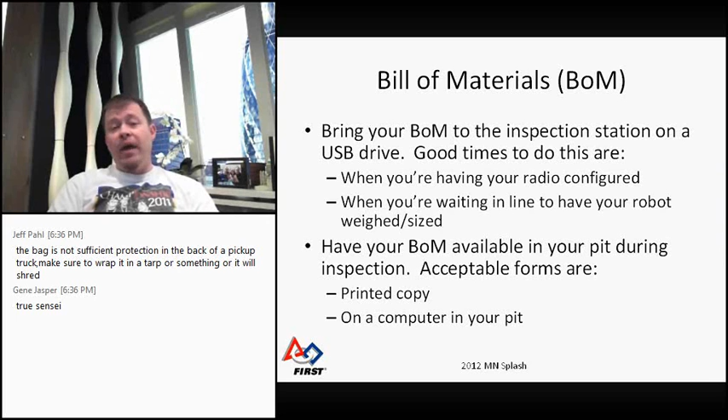Your bill of materials needs to be available at two different times. First, on a USB flash drive that you bring to the inspection station so we can load it onto the computers. This way, FIRST can use that information to help further fill out the kit parts in the future. Good times to do this are when you're configuring your radio, since you're already at the inspection station, or when you're waiting in line to have your robot weighed and sized, since you'll be right by that computer as well. You also have to have the bill of materials available in your pit during inspection. This can be done either on a printout or on a computer you have in your pit. You don't want the inspector to go back to the inspection computers to look at your bill of materials. It needs to be available in your pit.

So on to the actual inspection. There are a number of different steps in the inspection process that we're going to touch on here. The first is actually getting ready for the inspection. You want to take your bumpers off and remove your battery from your robot.

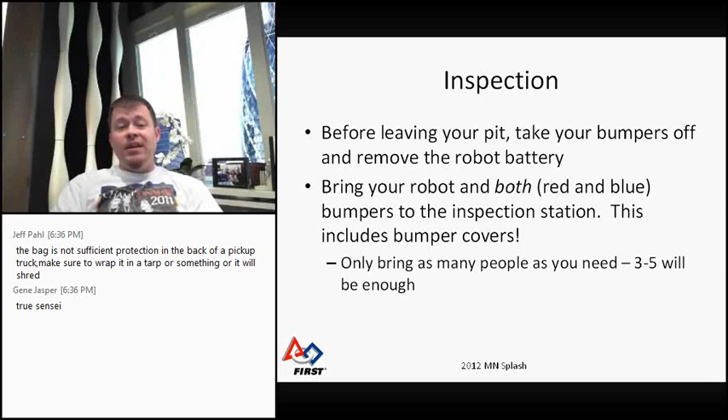When you bring your robot up to the inspection station, make sure you bring your bumpers as well, both sets, red and blue, including any bumper covers you might have. This way we can get a weight of both your robot and your bumpers to ensure your bumpers are within the allowable weight, and it lets us later weigh your robot with bumpers on for convenience going into the elimination matches. Only bring as many people as you actually need to move the robot and bumpers around. The inspection station can get awfully crowded when you have 20 teams trying to go through inspection at the last minute.

At the inspection station, you're going to start out by weighing and sizing your robot and weighing your bumpers. After you're weighed and sized, take your robot back to your pits. The inspector will either follow you straight back, or if there's a line for inspectors, because we only have so many at each regional, one will show up at a later point.

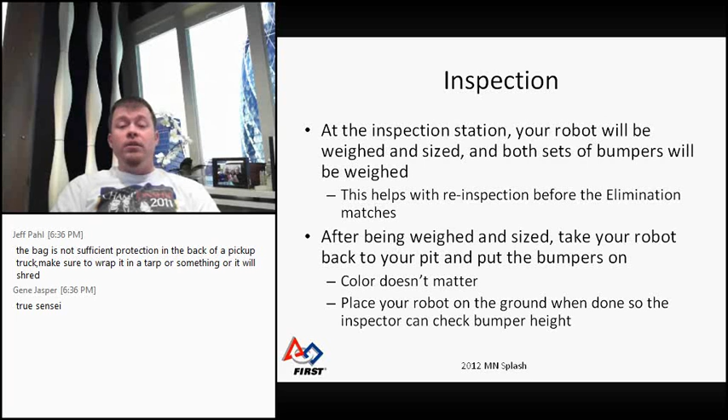When you get back to your pit, make sure you put your bumpers on. It doesn't matter which color, just put on the bumpers for your next match. We're going to want to see the robot on the ground so that we can check your bumper height, which is usually a pretty strict requirement in the rules.

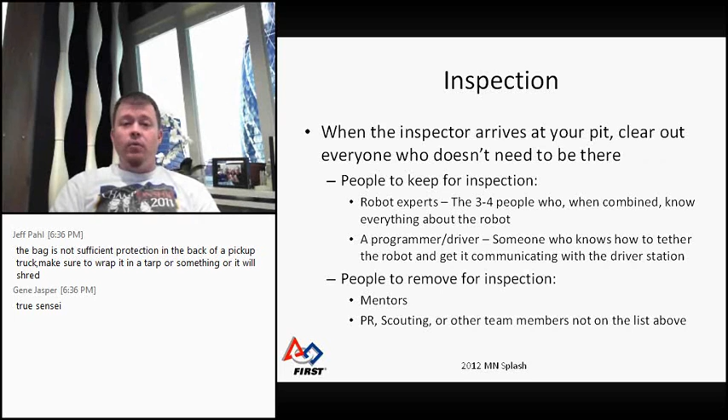When the inspector arrives at your pit, you want to clear out everyone who's not involved. We want to talk with the students, and only those students who actually know about the robot. Typically you may have 3 or 4 people who know about electronics on the robot, but we only really need one of them. You may have different people who are experts in different subsystems, so make sure they're all available. But get your mentors out of there, get your PR team out of there, get everyone who's not going to be interacting with the inspector out of the pits so that you can have room to walk around the robot and check it all out.

During the inspection, the inspector is going to be asking you a lot of questions. They're going to ask how many motors you have, how a particular mechanism works, and to describe your pneumatic system. Take these opportunities to show off your robot. Tell them how things work. Be proud of what you've accomplished, and the inspection is going to go a lot smoother.

Now, before you bag up your robot, take a look at the inspection checklist. It's usually posted about a week before we lock everything up, so that gives you plenty of time to go through the checklist and make sure you know everything you need to know. Have mentors, parents, teachers, or whoever you can get a hold of go through a mock inspection with you and make sure there are going to be no surprises when you get there. For example, make sure you don't have too many motors on your robot.

Now, reinspection. There are really two types of reinspection: voluntary reinspection, and the mandatory reinspection before the elimination matches. Voluntary reinspection occurs when you make a change to your robot. If you are adding on a mini bot deployment system, or you're modifying something on your tube grabber, you're going to want to come up to the inspection station and let us know that you've made some modifications. We'll send an inspector around, and that inspector will look at that specific area you've modified.

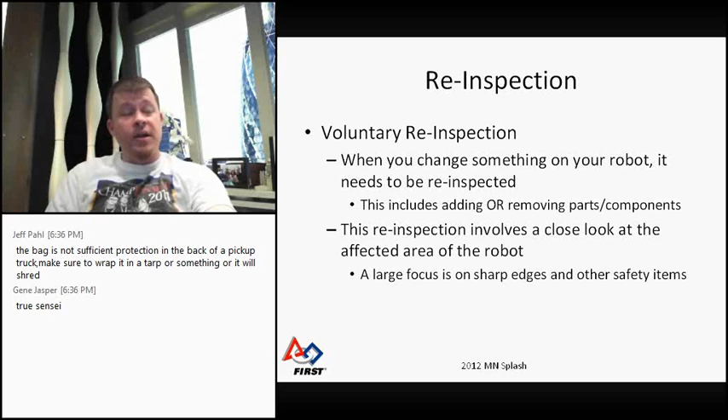Now, reinspection before the elimination matches is mandatory for all teams. After your last qualification match, we want you to bring your robot straight back to the inspection station, and we're going to reweigh you. You'll take your battery out, but you can leave your bumpers on for this reweighing. This way we can take the weight of your bumpers plus the weight of your robot against the weight your robot currently is, and it gives us a good indication if you've changed anything and forgotten to tell us. If your weight is off from what we expect, we're going to take a closer look, ask you what you've changed, and go over and make sure everything is still within the rules.

And so that's it for the process portion. Are there any questions?

Somebody did make a comment that the bag's not sufficient protection in the back of a pickup truck. Make sure to wrap it in a tarp or something or it will shred. You can imagine in the back of a pickup truck you get a lot of wind going through there. And if you've ever seen anyone going down the highway with a tarp hanging off the back of the truck, it just flaps all over the place and your bag will get some pretty serious holes in it.

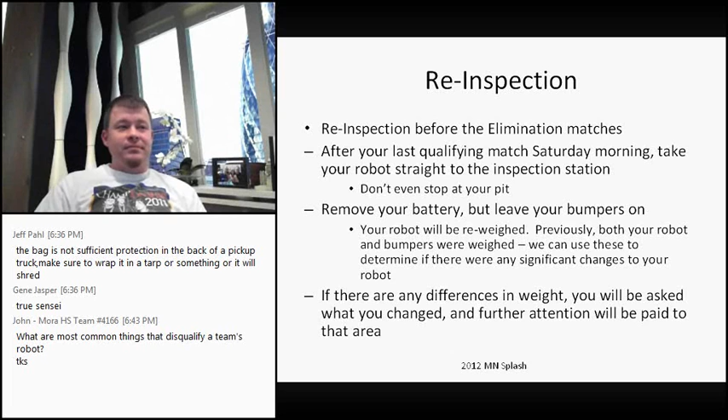As soon as I figure out how to do this. For those of you out there, Jeff does not have a webcam, so we will pause the video for this session. Nobody really wants to see what I look like anyway, so.

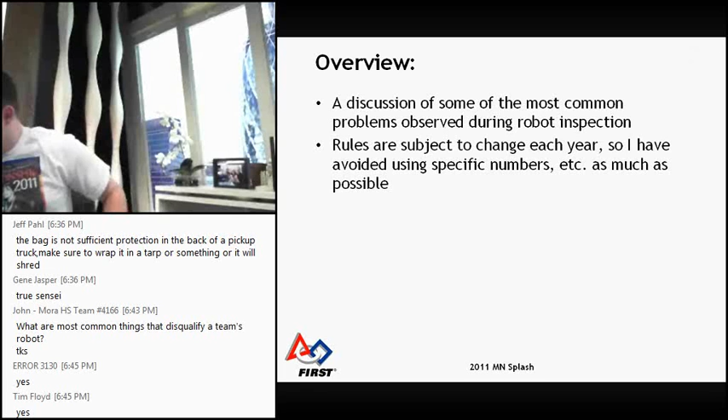The weight limit has changed a couple of times since I've been doing this, the size limits have changed. I've been doing FIRST since before there was a kit chassis in the kit, so when people say 'you always get this in the kit,' I say no you don't. So I'm just going to talk in generalities. These are all based on prior years' competitions—I haven't gotten to see this year's rules either, not that I haven't asked. So everything is subject to change January 7th, but I always start with those things.

So, number one, the quickest and easiest way to fail inspection is weight. There is a weight limit—I think the heaviest robot I've ever seen was about 200 pounds. You're going to hear me repeat certain themes over and over during this presentation because they're very important. Weight is one of them.

This is something I could spend an hour just on this part of the presentation, but if you don't take anything else away from this, take this: you want to manage your weight from the day of kickoff, not wait until you get to the competition and think you're going to drill holes in it. So, if you want a fun exercise, sit down sometime and calculate how many quarter-inch holes you have to drill in a quarter-inch piece of aluminum to lose 1 pound, and then tell me if you think you're going to do that in the pits on Thursday afternoon at a regional.

So, the best way to do this is make sure you have a weight budget. Keep track of each subsystem, keep track of the weight of each piece. The kids here with me from my team know what a total pain I am about the weight budget.

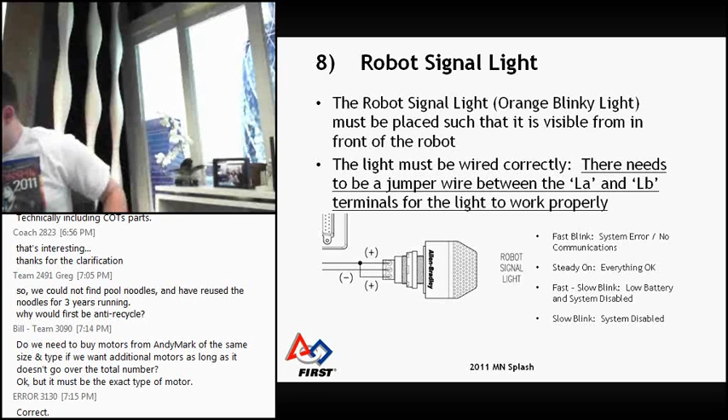Pneumatics. Improper operation of the air compressor is another one of the most common problems we run into. You get a pressure sensor switch in the kit. You're supposed to wire the pressure sensor to the cRIO Digital Sidecar, not just in line with the compressor. Every year I see at least one where it's just wired in line with the compressor.

The cRIO must control the compressor through software using a spike relay. This is so that when the field disables your robot, the compressor is disabled. We don't want it to sit out there and continue running if we need to shut your robot off because we have a problem, especially if it's due to some sort of pneumatic failure and you've got hoses flailing around.

The other reason you can't wire the switch in series, since I get asked this question every year, is if you pull the data sheet for the switch, it's about a 3 or 4 amp switch, maybe rated for 5 amps. The compressor pulls about 25 amps at startup. Yeah, the switch works, it'll work for a little while wired in line, but it will not work that way for long.

You need to set the software up so that the compressor shuts off at less than 125 psi. If the compressor shuts off when the switch opens and closes, you should be just fine.

The spike relay that you use to control the compressor is the only place where you can pull the little yellow fuse out and replace it with a 20 amp circuit breaker. We tell the inspectors to check this.

Sometimes it gets missed. I know of an instance last year where it probably very possibly cost a team a regional championship. The reason is that compressor pulls about 25 amps at startup, and it's a 20 amp slow blow fuse. You can get about 16 to 18 matches before that fuse reaches the point where it finally says, I'm tired of being abused this way. You figure it out, 16 to 18 matches puts you about 3:30 on Saturday afternoon. That is not when you want to find out that you no longer have any pneumatics in your robot.

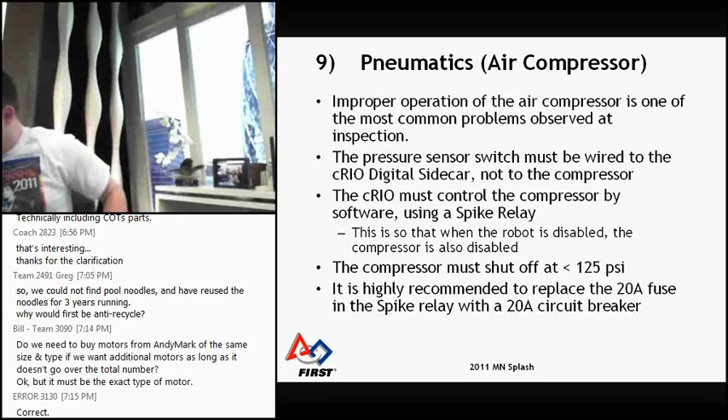So we try to get all the inspectors to check this. It does get missed, but you can go ahead and do that. The other thing we run into is teams that replace all the spike fuses with 20 amp breakers, and you can't do that, only on the compressor, because of the high current draw, mostly related to the older kit compressor. The little compressor that came last year in the rookie kits doesn't draw as much current, but you can still do the replacement.

I'm going to say, don't use it more than whatever the number and type of pressure storage tanks are that are allowed in the rules.

Previous years, there have been 2 tanks, 4 tanks. Last year, it was basically whatever amount of storage you could bolt on your robot and stay within the weight limit. I don't know if they'll go back to a defined limit this year or not. But make sure you read the rules and see if there is a limit. Don't just assume because there was no limit last year that there's no limit this year.

The other thing I'm not sure about right now is last year a lot of teams started using plastic storage tanks. AndyMark is now selling the plastic storage tanks in a kit that they sell. Keep in mind that AndyMark sells a lot of stuff to people who build robots for applications other than FIRST. Not necessarily everything on their website is FIRST legal. Those white plastic tanks may or may not be legal this year.

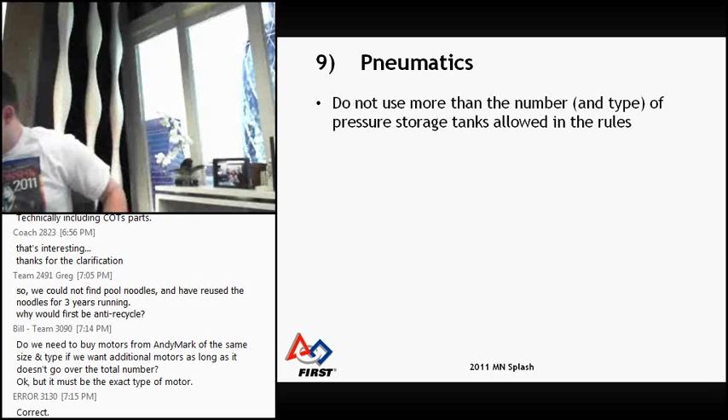I've heard some noise that there might be something, or there might be some sort of a rule, and I'm just basing this on speculation. I don't know anything that says that if you use a plastic tank, it must be protected. Because we saw them on robots last year where they were out on parts of the robot that were getting hit by other robots and stuff, and it became a safety concern. So like I say, I don't know anything. If they're legal this year, I would not discourage their use. They're lighter than the aluminum ones, they're cheap. Just pay attention to if there are any rules that say if and how they can be used. Goes back to the whole, just because it was legal last year doesn't mean it's legal this year discussion.

That's just the whole pneumatics thing, but the pressure relief valve that comes in the kit of parts must be directly attached to the compressor, not through a piece of hose, rigidly attached to the compressor. You need to set it to the appropriate pressure, and we do check that by shorting out your pressure switch and seeing where it goes to. Usually there's directions posted with it. If you're not sure how to do it, send me an email, send John an email, contact a veteran team around you that knows how to do it.

You have to have an easily accessible vent valve, and that vent valve needs to drop the entire pneumatic system to atmospheric pressure. It needs to be upstream of your first regulator.

All pneumatic components must meet the minimum pressure rating given in the rules, which typically in the past has been 125 psi. If you're using pneumatic parts that did not come in the kit, you must have manufacturer's documentation for those parts, or they must be clearly stamped by the manufacturer with a pressure rating. Expect to be asked for documentation at inspection for anything you bought that's not in the kit - air cylinders, pressure tanks, tubing. That's one to watch out for, if you buy tubing, a lot of tubing doesn't come with a pressure marking on it. Be prepared to show me a receipt that says you bought 100 feet of type X tubing and the manufacturer's published data sheet for tubing type X.

So, moving on to item number 10, firmware versions. Even if you got a new cRIO this year, odds are it shipped from National Instruments prior to somebody making a firmware update. So pay attention to the team updates that come out through the course of the season, in case there's a statement saying you need to update to a current version.

You want to do this before you ship, because if you end up doing the update at the competition—because we tell you that you can't connect to the field since you didn't update it from what it shipped from NI in October—you'll have to load all the new libraries on your computer, recompile, and redeploy. It tends to take about an hour. You're wasting practice match time, or you're missing matches. So pay attention to that.

And another one: if you decide to use CAN with the Jaguar speed controllers, we end up checking the firmware version of the speed controllers to make sure that's also the latest version. So if you're using CAN, you understand enough about the system to know where to go to get the firmware and make sure you have the latest version. I'm not going to go into any details.

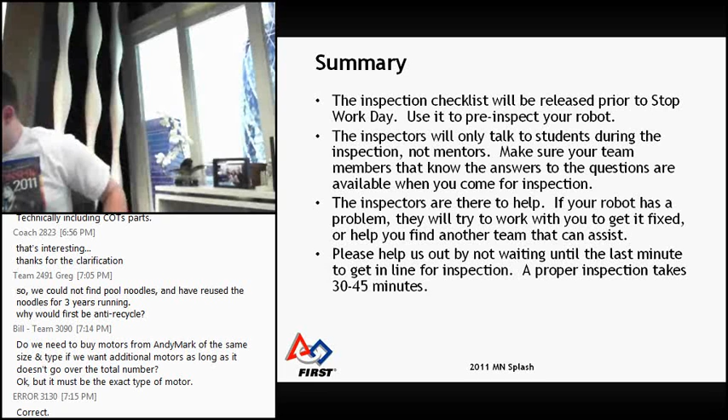So if you disagree with what the inspector tells you, please very politely ask to get a second opinion from the lead robot inspector.

The inspectors at the competition get a couple hours of training at the event. We try to get them some materials beforehand, but they're all volunteers. Typically they're members of a team, but they don't know every last detail. They may not be a pneumatics expert, or understand some complex mechanical mechanism. So please keep gracious professionalism in mind. Please do not argue with our inspectors. Please treat them very nicely, and please, they will not be offended if you ask for a second opinion from the lead robot inspector. The lead inspectors get more training than the other inspectors do.

John and I both have the privilege of having to go to New Hampshire in January, because it's the only place they could find that would be colder than Minnesota, to spend a weekend at lead inspector training. But that said, if the lead robot inspector tells you something is not legal, it's not legal. There's nobody else in the building to overrule that decision.